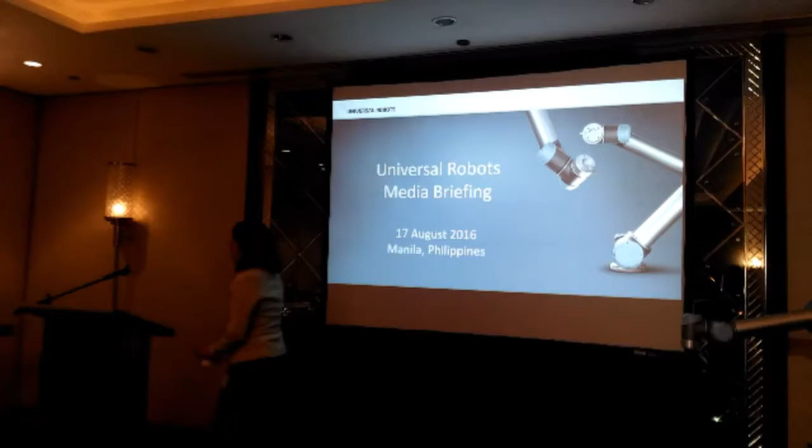For my presentation today, I will be telling the story and journey of Universal Robots. I will share our products, reveal our strategy for the Philippines, and last but not least, share with you a case study as well as a robot demo.

So how did it all start for Universal Robots? Universal Robots was founded in 2005 by 3 Danish students while doing their PhD at the University of Southern Denmark. At that time, they were working on finding the best automation solution for the food industry. They found out that to put pepperonis on pizzas, you would have to use robots of about 150 kilograms placed on Euro pallets and drive them around to do that. They also discovered that the robotics market was dominated by very large, difficult to program, heavy, expensive, and unsafe robots, whereby you need fences to put in place to work with people. So this was where the whole idea of making robot technology came about.

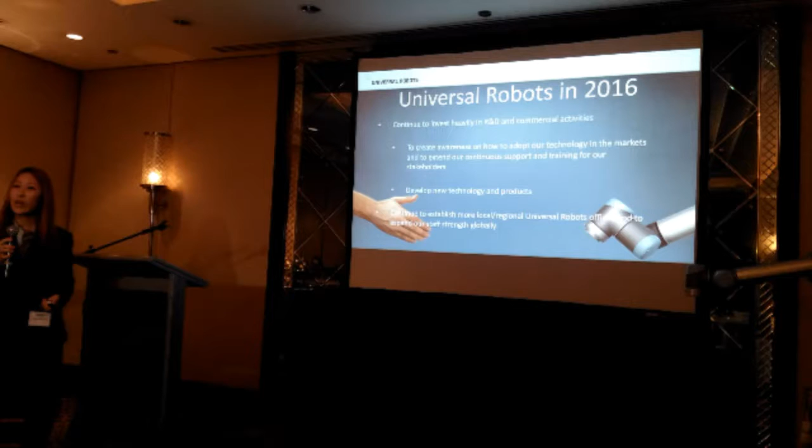So what's going to happen for us in 2016? Universal Robots has experienced very great growth in the many years that we've supplied our collaborative industrial robots to the markets. So we will continue to invest heavily in research and development so as to bring new technologies and products to the market. We will also continue to invest heavily in commercial activities so that we support our stakeholders to support the users in the market. We also want to ensure that we create awareness on how to adopt our technology in the markets.

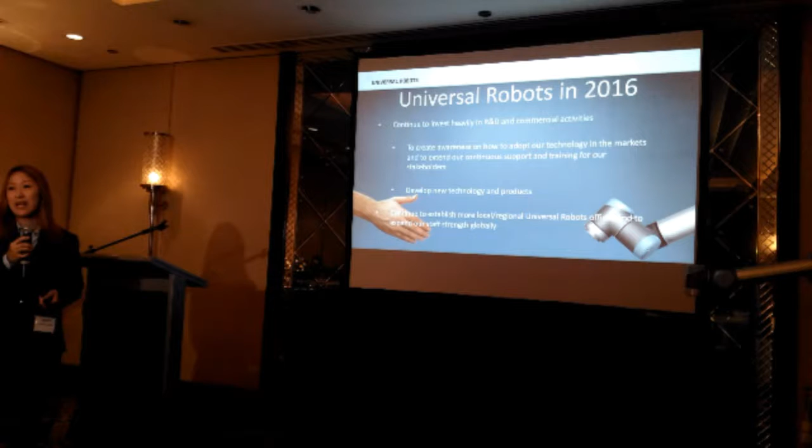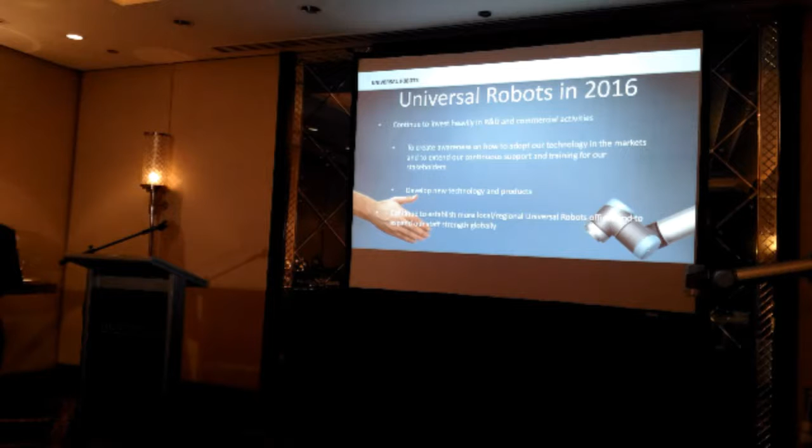We also will continue to add more local and regional offices. So we will also expand our staff strength globally. Currently we have about 300 employees globally.

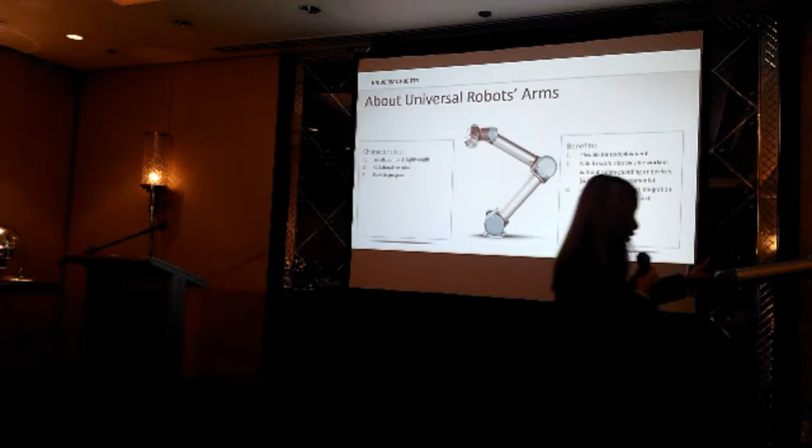I'd like to share with you the unique benefits and features that our robots bring to the users in the market. There are many features, but I want to list out 3 important areas. The first one is small, lightweight, compact, and this gives great flexibility to the users. Our UR5 here has a maximum payload of 5 kilograms, and the arm itself weighs only 18 kilograms, so it has a very good ratio to the payload it can lift.

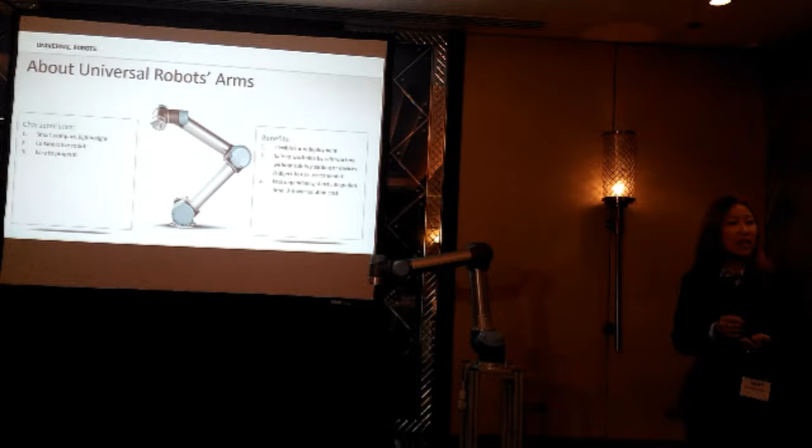And there are 3 main areas of benefit. First, for small and medium-sized companies who produce small batches - high mix, low volume production - it is ideal for them to adopt automation now because they have the possibility to do so with Universal Robots. They can move the robots around and redeploy them to other manufacturing lines that they have.

Also for seasonal production - even very large companies that produce products for the winter season for half a year and then don't produce again for half a year - now they have the chance to redeploy the robots on the summer line production. Also for very large companies with a short product life cycle, meaning they need to come up with new products all the time, they now have the option of redeploying their equipment and technology to suit the manufacturing landscape changes as they continue their business.

The second area is that you basically do not need to change the existing production layout. You can see that the footprint is very tiny - 4 bolts is what you need to tighten the robot. So you don't have to start finding space or changing the layout of the production, which again increases cost and is a great hassle to the manufacturers.

And thirdly, it can now automate processes which the large traditional industrial robots cannot, because the large ones cannot go into the tight spaces that Universal Robots can. So these are the 3 main areas about the flexibility part of benefits that we can bring to the users.

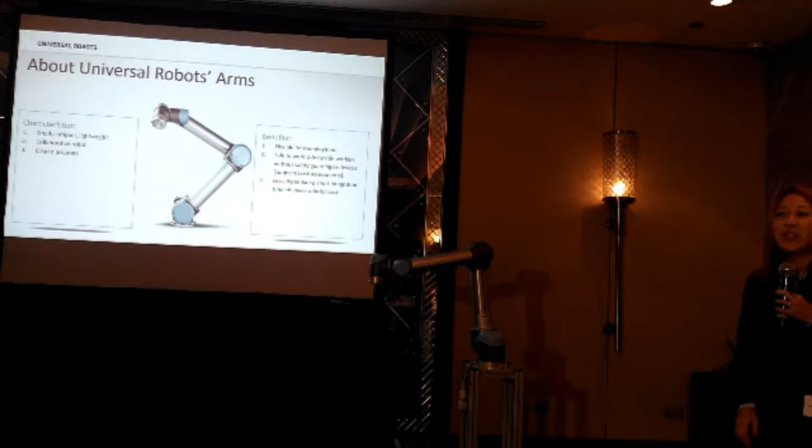Thirdly, our robots are very easy to program, much easier compared to traditional industrial robots in the market. The idea here is to put automation back into the hands of the operator. We want users to be self-sustainable, independent in their own manufacturing processes so that they have full control over it. Now their engineers can learn how to operate the machines, and they can also learn how to deploy solutions in their manufacturing facilities.

This means at the end of the day, it has a lower cost for the manufacturers. Also, with a very short integration time needed to deploy a solution, it means the cost of integration is 30 to 40% lesser than with traditional industrial robots.

The other platform we have is called Universal Robots Plus. It was launched this year, and it is a meeting place for developers, distributors, as well as manufacturers in the industry. It's a showroom where we showcase proven technologies, applications, and plug and play modules already available in the market. This is to shorten the time and cost for manufacturers to do their own deployment, so from concept they don't have to go through trial and error. They can refer to proven case studies and know which equipment to purchase and put together to make a solution, saving time and cost.

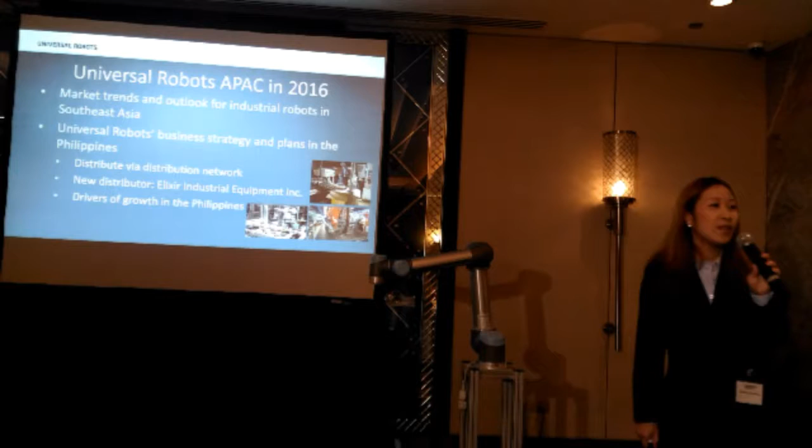So what's in store for Universal Robots APAC in 2016? We will be further separating the Asia Pacific region because we have grown to such a huge size. We will have a region called Northeast Asia and Southeast Asia plus Oceania. That is the direction we are going for 2016.

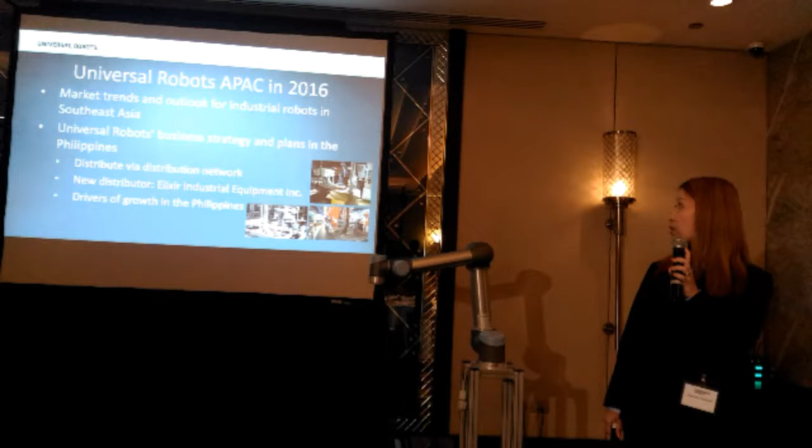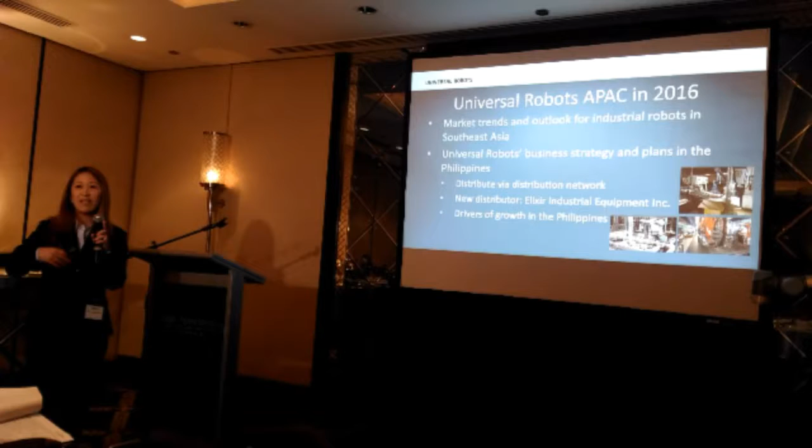We have noted that the interest and willingness to adopt automation, particularly collaborative industrial robots or applications, is on the rise. In 2012, when we started establishing our distribution network in this region, collaborative industrial robot applications were unheard of. There was a need for great education and explanation to the market about what this is all about and what it means at the end of the day for users.

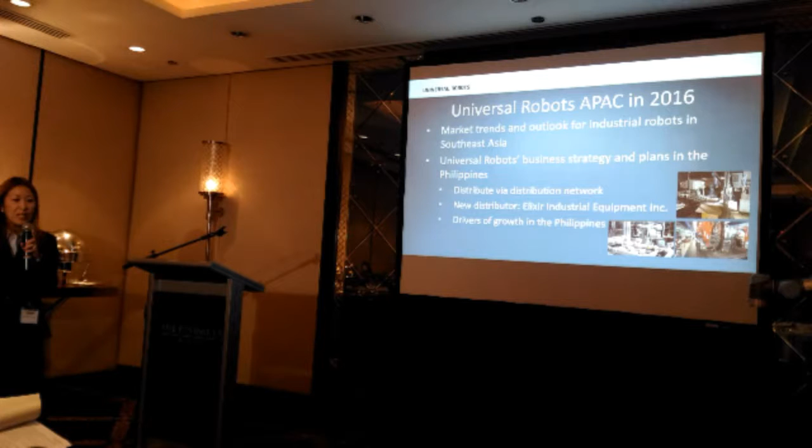But now we have seen markets like Thailand triple their sales in the past three years. We've seen countries like Vietnam and the Philippines with inquiries coming in. Singapore is actually one of the top 3 markets in our region. Considering these countries based in Southeast Asia, we are already seeing a high adoption rate, and we believe that with the challenges manufacturers face in this region, this is going to just keep rising.

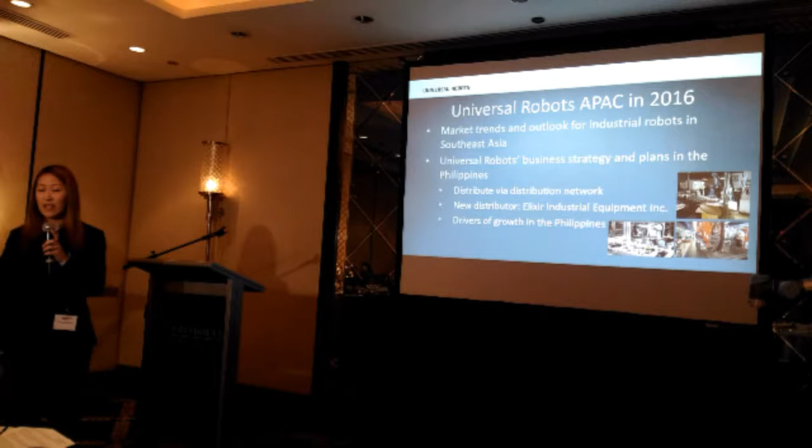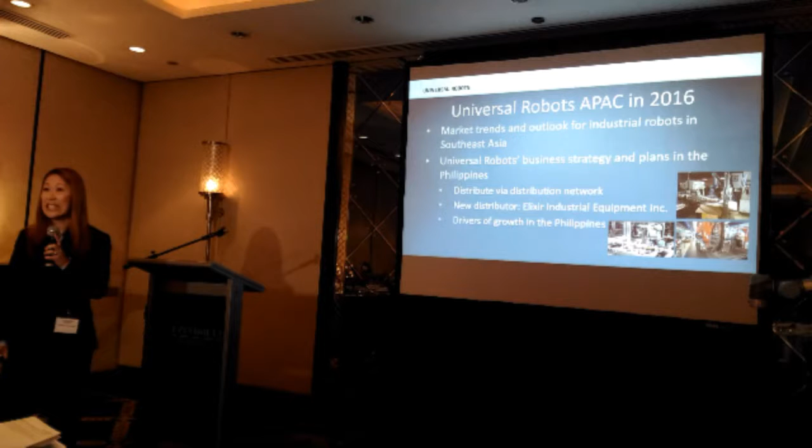Our strategy will still be very much the same - we will continue distributing via a distribution network. We will continue to ensure that in the Philippines, the potential in the market is well covered with a strong network of distributors. We have, with great pleasure, partnered with Elixir Industrial Equipment a couple of months back, and we have already seen sales happening - we have users in the market already.

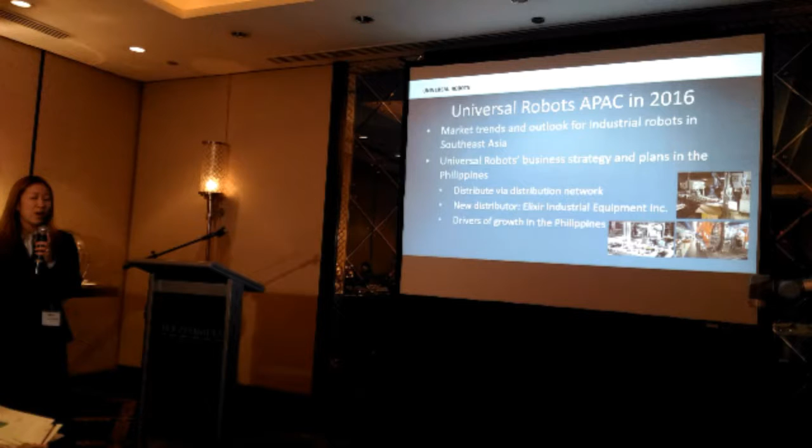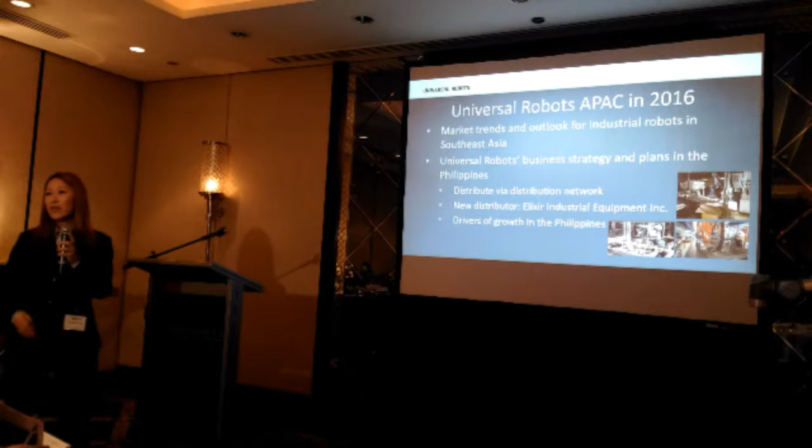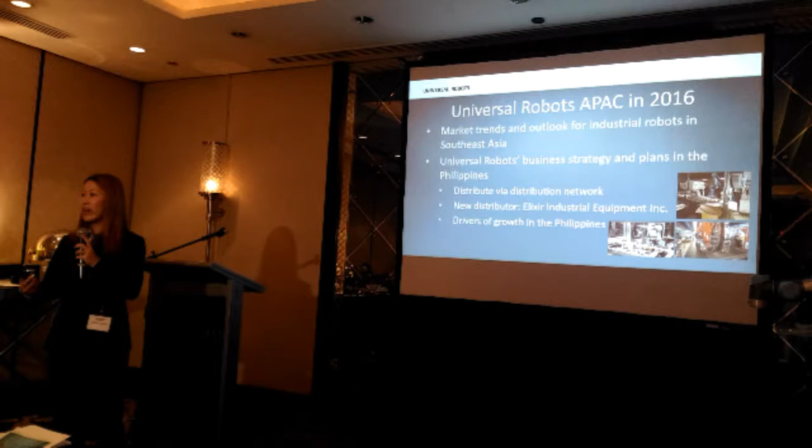We also believe there will be key drivers to the growth of the Philippines market, mainly because of the huge manufacturing industrial presence here - many different sectors such as electronics, semicon, automotive, pharma, and food and beverage. We've also seen that manufacturers in the Philippines are very receptive to automating their plants, which is a strong sign. We understand the government has a strong focus on supporting small and medium-sized companies here to boost productivity by looking at technology and innovations. I believe it was announced in the national budget that funds have been set aside for this as well. These are all positive signs, and we believe this will drive the growth of our industry in the Philippines.

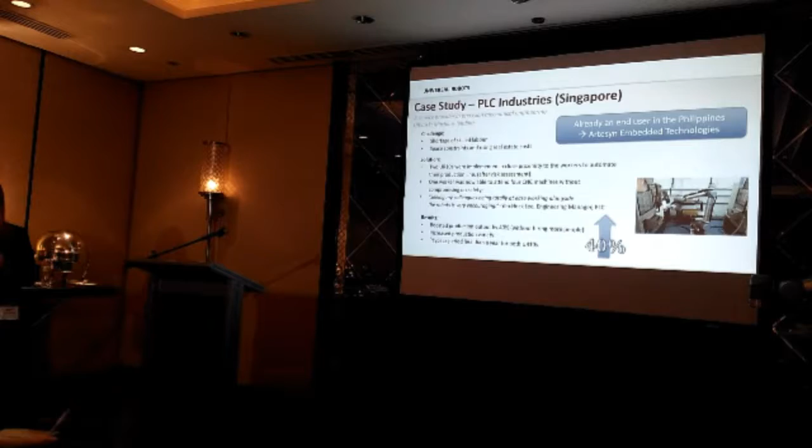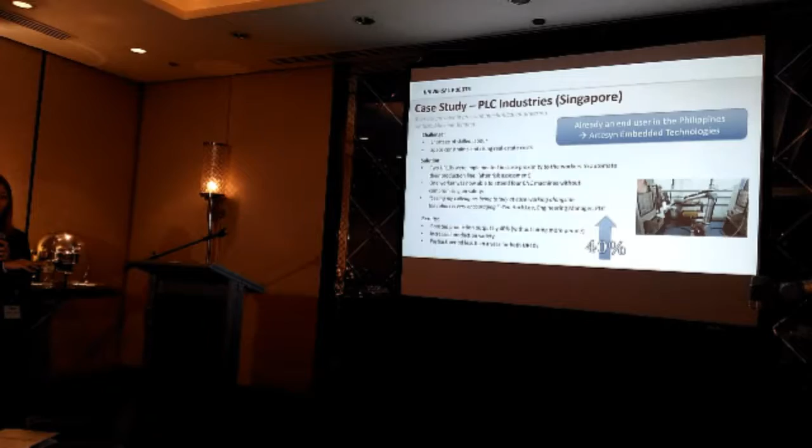Here is a case study I'd like to share with all of you. It's a customer in Singapore, a company named PLC Industries. They are an SME in the precision engineering industry. The task they needed was machine tending, and the challenge is that they produce up to 80 different products a month. So as you can hear, with 80 products, they needed a very flexible solution to automate their processes. They also faced the challenge of finding a skilled labor force, which led them to consider Universal Robots because of the unique offerings and benefits we could provide.

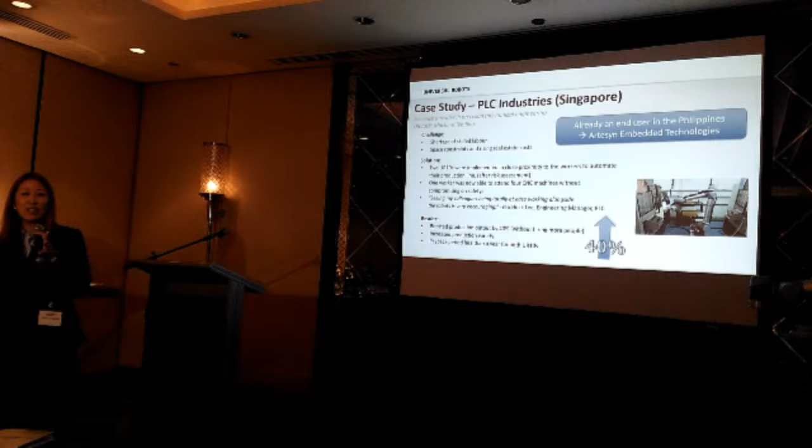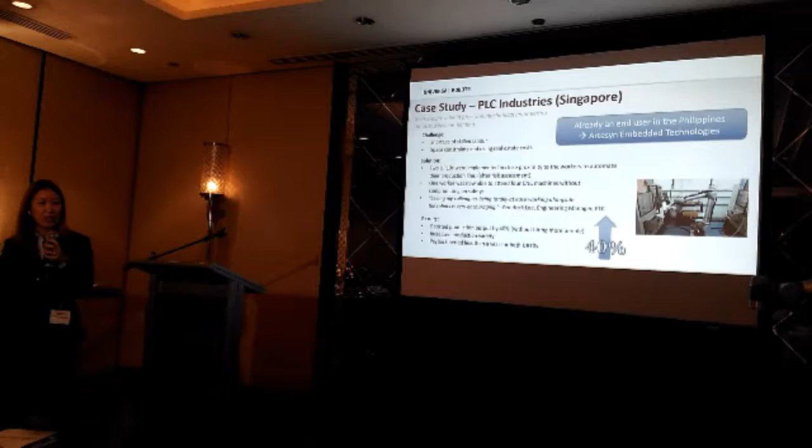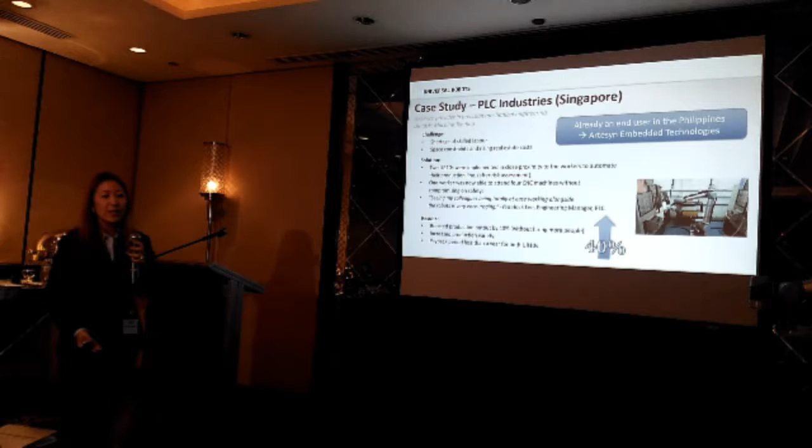Two UR10s were implemented, with each robot tending two CNC machines. Because there's no need for safety fencing, even in a very tight space, they didn't have to move the machines around - they put the robot between the two machines, and it could reach into both. This meant that instead of one person tending one CNC machine, they could have one person tending four CNC machines. This boosted productivity by 40%, and they were still able to continue producing their variety of products, with a payback period of less than a year.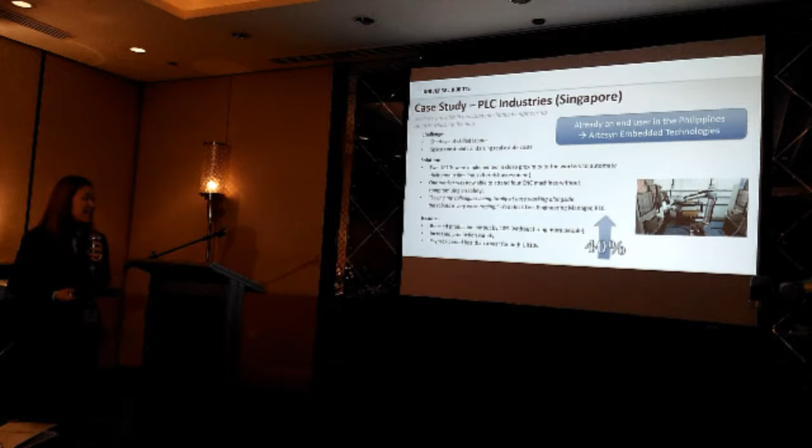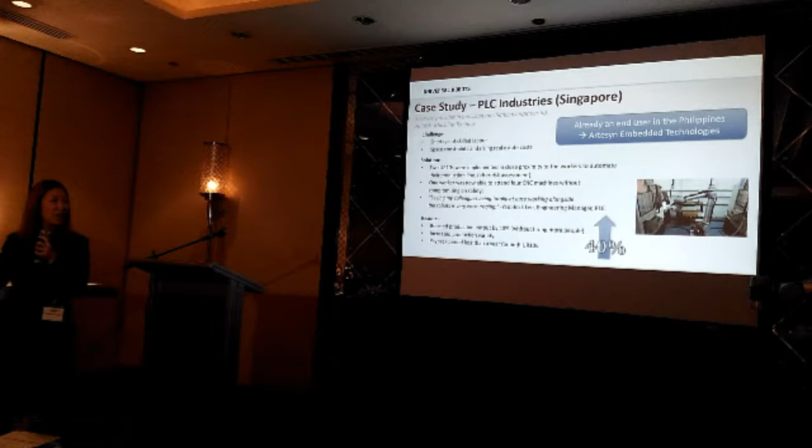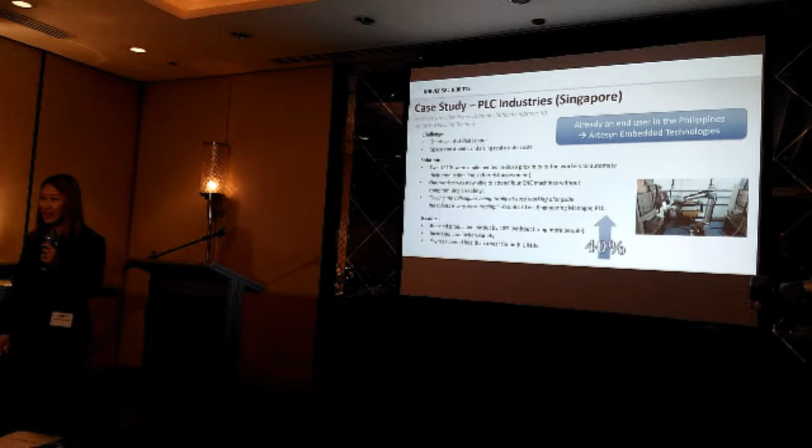One of our first users in the Philippines is Artesyn Embedded Technologies. They are in the electronics and semicon industry, and they have about 4 of our robots, all the different models, in their production facility.

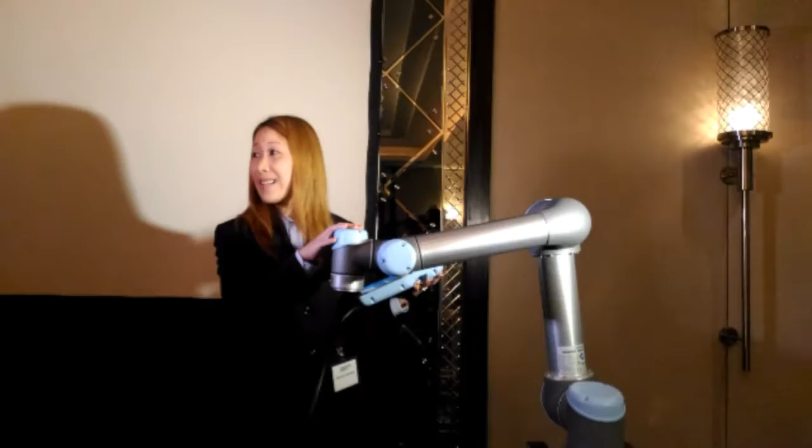So this is a 6-axis articulated industrial robot. You can see 6 axes here, and it's modularly designed. Every axis has its own gear, servo motor. The electrical component is all inside the joints. It's hollow here, so only 4 cables run through it, and this means there is a very short downtime. If you need to change this out, it's just take this out and put a new one in, and 4 bolts to fix the robot.

This is the controller box. Some of you may know that the traditional industrial robot's controller box looks like a refrigerator size. This one is only 29 kilos, so a woman can basically carry this unit out, set it up, and bring it down.

Here, this is the teach pendant. I will show you that you can create a very simple program. So if you go to an empty program and say I'd like it to move from point A, B to C and back to A, I'm going to set this waypoint. You can see there are arrows here where I can move the robot to where I want it to be.

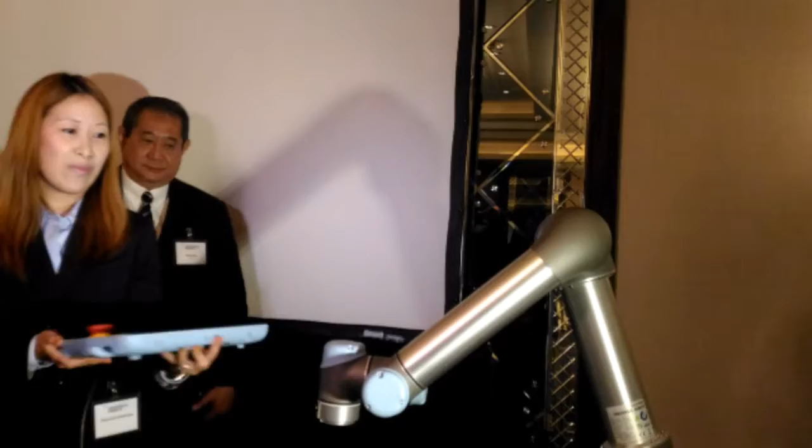Say for example the robot has to pick something up here. You can see it turns green, basically saying that waypoint A has been defined. You can go to B. If you don't want to use this graphic user interface, you can also key in the positions if you know exactly where you want the robot to move into. Or otherwise, you can learn it or do it the very intuitive way, by holding this button down and moving the robot arm to where you want it to be.

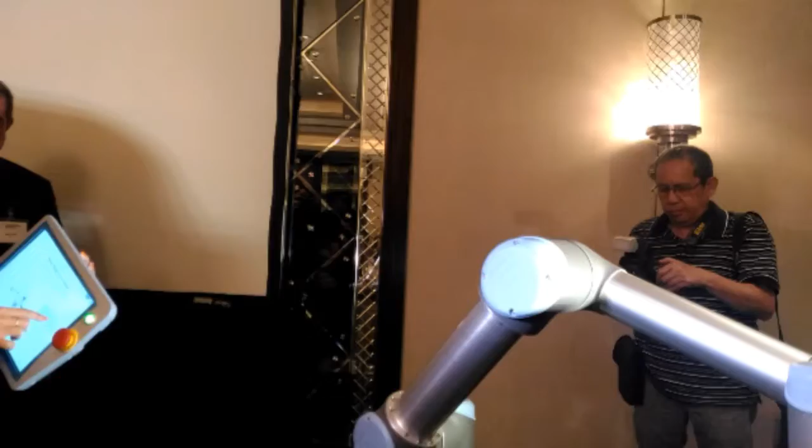Happy with this? Say that it has to go back, do this. And now I have quickly made a 3-waypoint program, and this means you can map out the program very quickly on site to see that it works.

You can of course adjust the speed up to higher speed here.

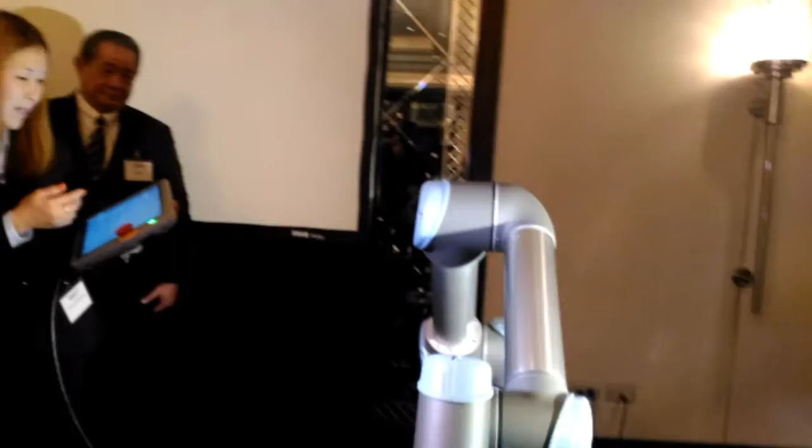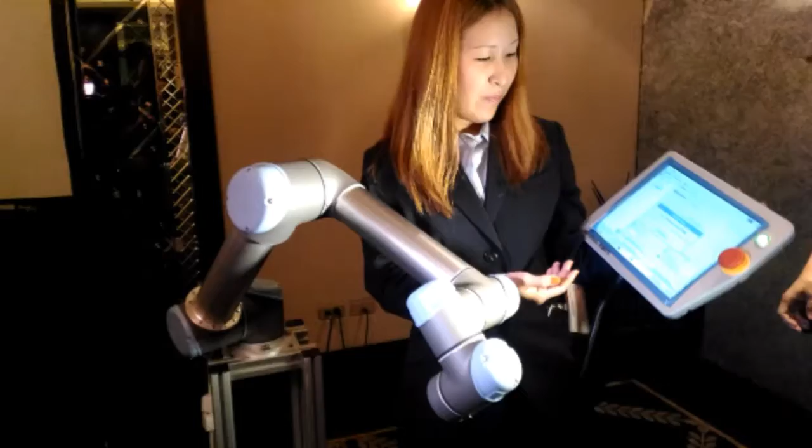You can also adjust the force for the UR3 to as low as 50 newtons. So you can see when it hits me, there's a protective stop and it stops. So I can enable the robot and it will continue. It's basically very safe to work side by side with people.

And of course, you have to do a risk assessment prior to the actual installation, because if you are carrying a maximum payload, moving at maximum speed and at eye level of the worker, then it just makes common sense to do some protection, fence it up or do a light curtain to make sure that it's safe.

Anyone wants to have a go to do the programming? This is a very short demo to basically highlight how easy and quick you can make a program, and when it hits you, it will stop automatically.

It's okay. Any questions? Otherwise, thank you very much. And I'm still around, so you can come up to me if you have any other questions.

With regards to the warranty and the after sales support: you can always extend the warranty by adding another year to it. So you have to purchase an optional warranty as an additional add-on, which costs extra. And the after sales service support is provided by our partners, our distributors.

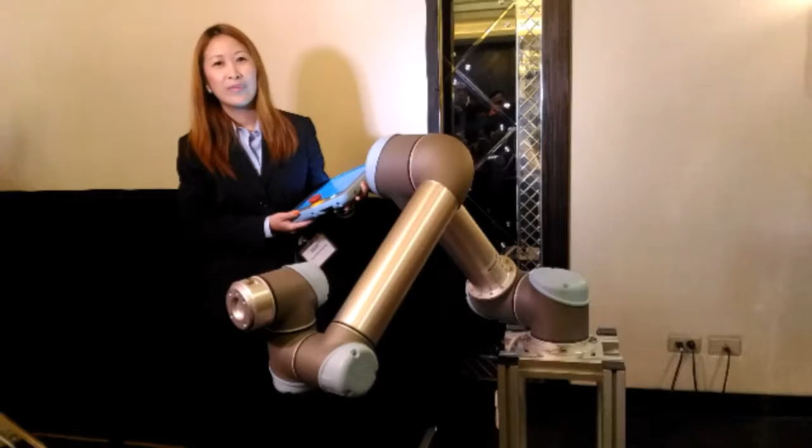Since Elixir is your partner here in the Philippines, if any particular company ordered the universal robot, do they immediately have you have stocks on hand? Yes, they need to.

We have a very short lead time, in fact, one of the shortest in the market for industrial robots. And for a low volume, say 1 unit, we have them on stock. This is to ensure that we have a very fast delivery time to the market.

Of course, if you look at a higher volume, then it's typically 2 to 4 weeks. Traditional industrial robots' lead time will easily be between 2 to 4 months. So this is where we also try to be on the edge of the service part of it to the market.

We have a phone-in question. Sorry, she can't make it, she's stuck in traffic. The question is: is Elixir capable of reaching all types of markets, or are you just focusing on Metro Manila?

They have their own business plans, and they will start somewhere, just like any other businesses. They will then look into reaching out to the market, the different aspects of the market. But as we observed in many other markets, one partner will find it difficult to cover the entire potential in any one market. So we foresee that we will have a strong network of distributors in the Philippines, just like in any other countries. This is to make sure that they all complement one another, and that there's no gaps in the market, because at the end of the day, the users will be our priority.